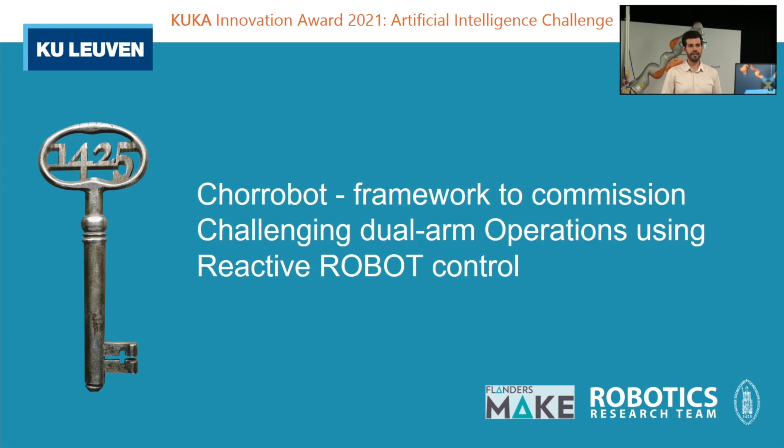Hello everyone, we are very happy to introduce you our team Chorrobot, our concept Chorrobot, which stands for Framework to Commission Challenging Dual Arm Operations Using Reactive Control. We are from the University of Leuven and we are also members from Flanders Make.

Our main motivation is to move from traditional robotics typically deployed in large-size industries, which involve high automation costs associated with programming time, the expertise required for programming, the use of calibrated fixtures, and the fences placed around robots to separate them from humans.

We want to move to more advanced dual-arm applications in manufacturing, where Chorrobot aims at offering intuitive task commissioning of challenging operations that can handle flexible objects, such as inserting O-rings into pistons, as well as the possibility of having two robot arms in the same workspace while handling collision avoidance.

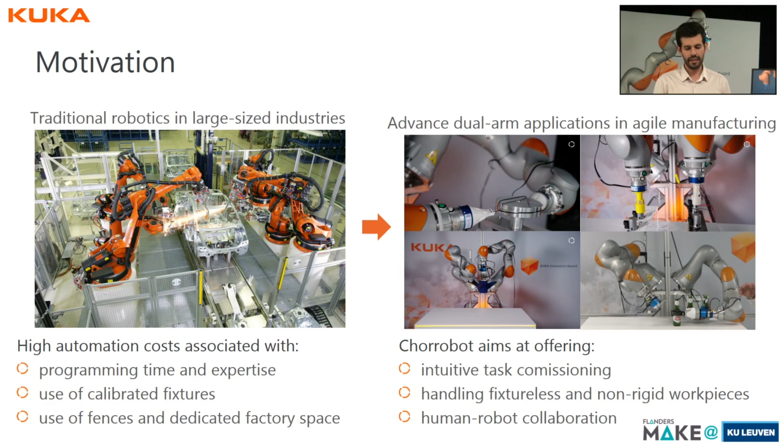We also further exploit the dexterity of Chorrobot, having 14 degrees of freedom to augment the workspace, so we can handle fixtureless and non-rigid workpieces in a human collaborative application.

The main key technologies using artificial intelligence in our concept are the possibility of teaching position, orientation, forces, torques, and coordination between the two arms using our state-of-the-art method: trajectory parameterized probabilistic principal component analysis.

On top of that, we can also enable the specification of other aspects of the task, such as the automatic resolution of constraints, for example collision avoidance.

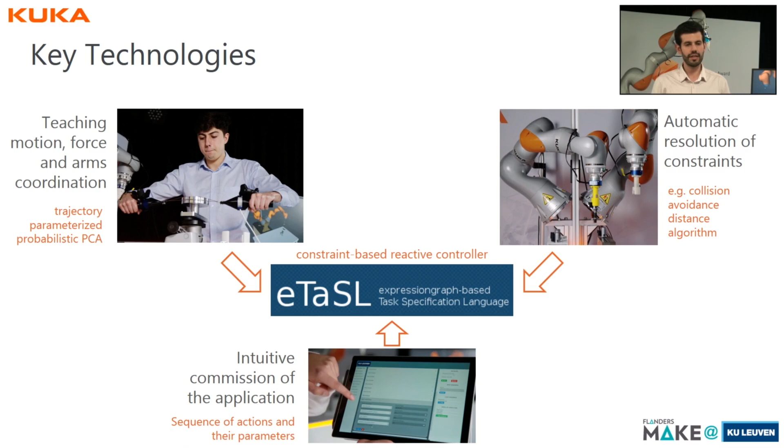All of this can be intuitively commissioned using our graphical user interface, where you can commission the sequence of actions with their parameters, tightly combined with our constraint-based reactive controller, ETASL.

For the level of integration, we place Chorrobot at the very end of the TRL level, so we are already working with workpieces found in factories and in applications that are already very industrially relevant.

Our main customers are robot manufacturers such as KUKA, who want to offer the possibility of completely exploiting their platforms for deploying challenging operations.

Also system integrators such as FRS, which are already deploying challenging operations such as inspection in the Audi factory. Other system integrators we are targeting are already using teaching devices to play, record, and play back motion, for example in free space and simple contact tasks.

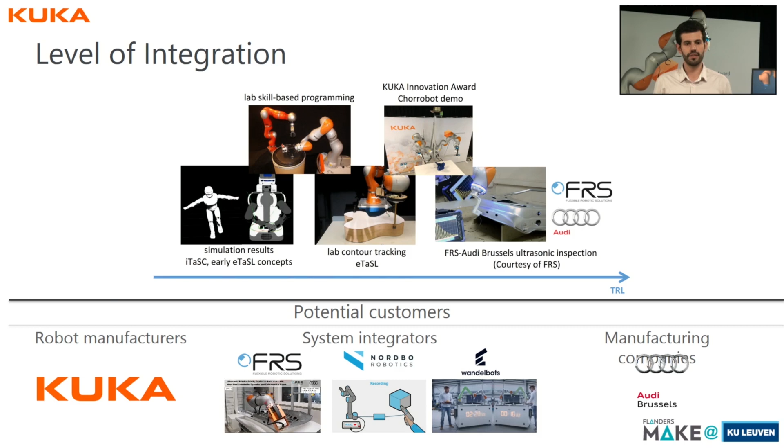Additionally, we want to offer manufacturing companies the possibility to deploy their own applications and further refine them. For the economic impact and competitive advantage, Chorrobot offers higher productivity, increasing economic impact, and lower automation cost, meaning less commissioning time.

For example, for one application, we asked several system integrators, and they told us they would spend around 20 days commissioning one application. We want to offer them the possibility to commission it in 1 to 3 days, depending on the case. Take into account that a robot programmer can cost around 800 euros per day.

We also offer less calibrated fixtures, so the design and development of these fixtures costs between 1,000 and 2,000 euros depending on the application, along with the possibility of having higher flexibility and reliability, meaning fewer stops in the production line.

Chorrobot also offers easier commissioning, enhancing competitive advantage. It will lower the barrier of industrial automation, so there won't be a need for highly skilled robotics experts, offering easier access for developing countries and SMEs. Take into account that the UN is already recommending developing countries to embrace automation.

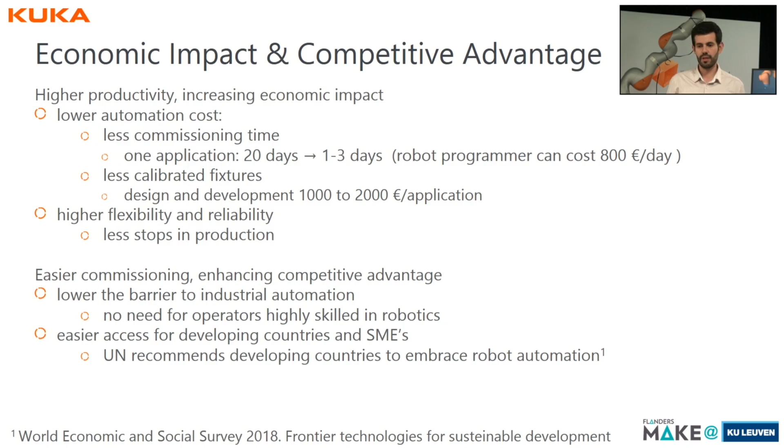Now I want to leave you with the challenging task that we prepared for you.

It is very difficult to program tasks that require two hands using traditional robot paradigms. For this reason, we use artificial intelligence in order to teach Chorrobot how to learn to perform a challenging task through user demonstrations.

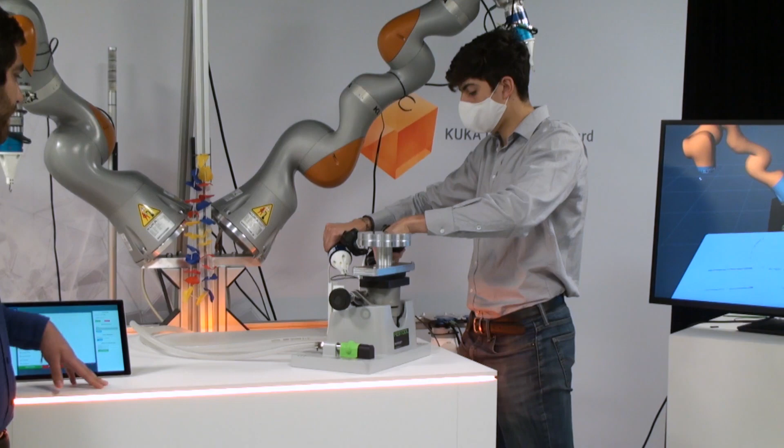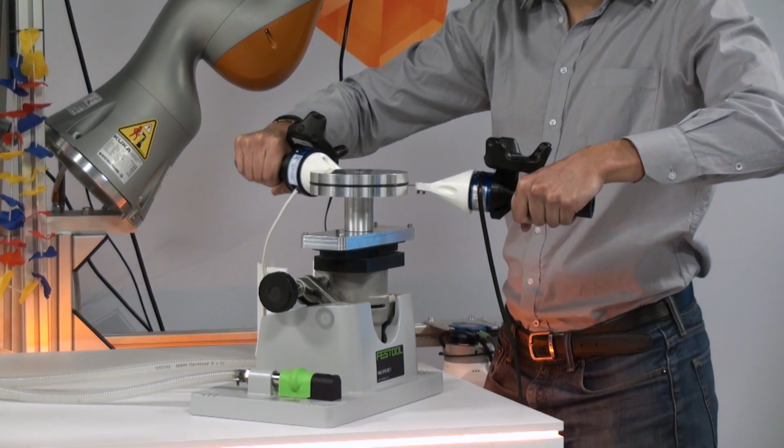In this first application example, you can see how an operator teaches the system how to install a flexible O-ring into a piston. Through the use of our easy-to-use tools, the system not only tracks position and orientation, but also all the interaction forces necessary to successfully execute the task.

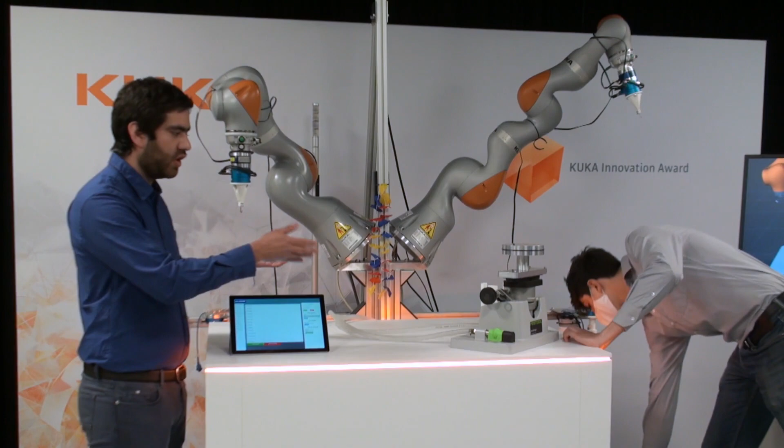After the operator demonstrates not only one but five different positions along the workspace, different demonstrations are made by switching the positions of the piston and also from the picking base.

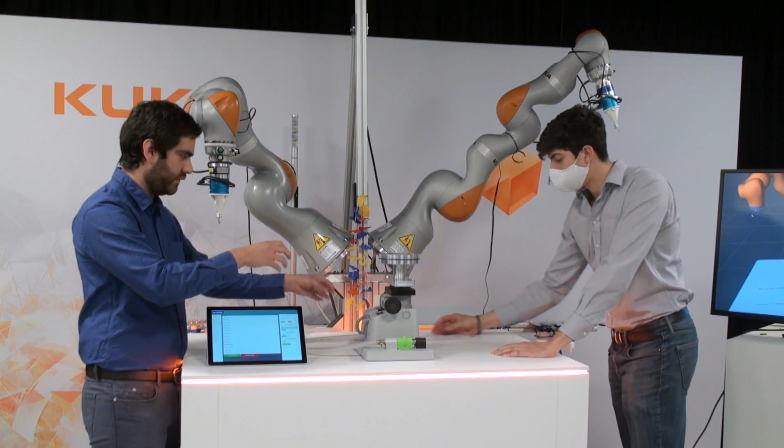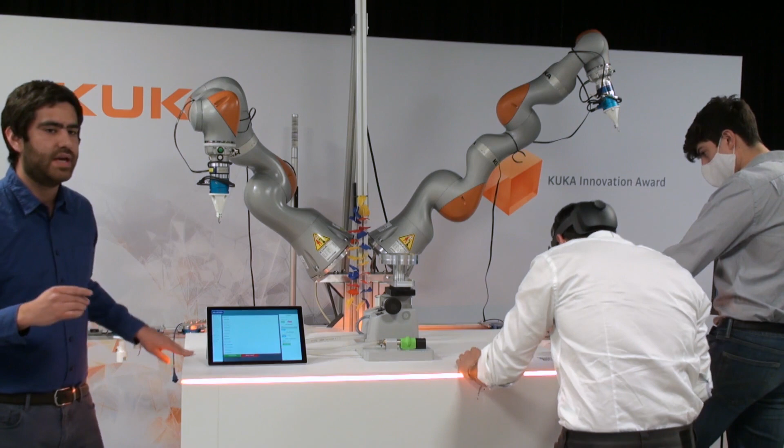Then it is very important to first simulate the task and see that the knowledge was well transferred. For this reason, we use the Microsoft HoloLens 2 to visualize the application in simulation in an augmented reality scenario.

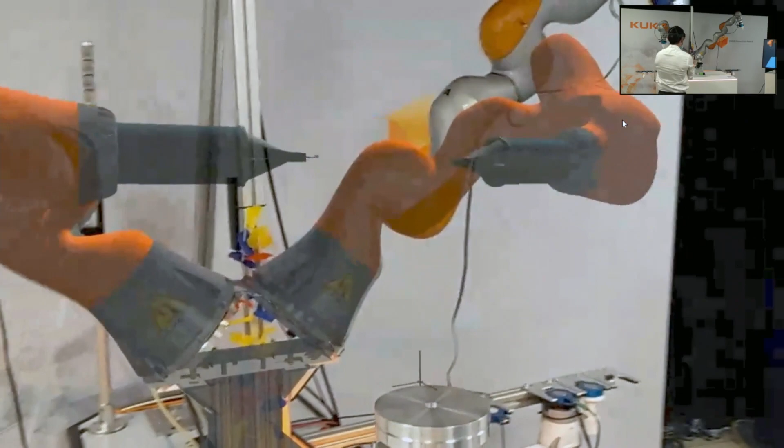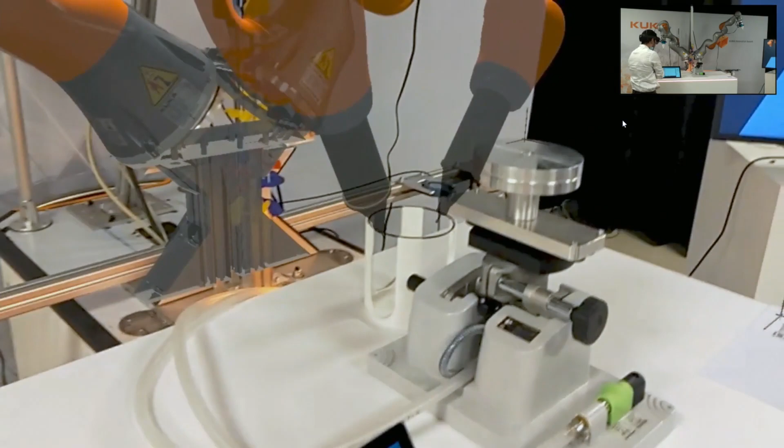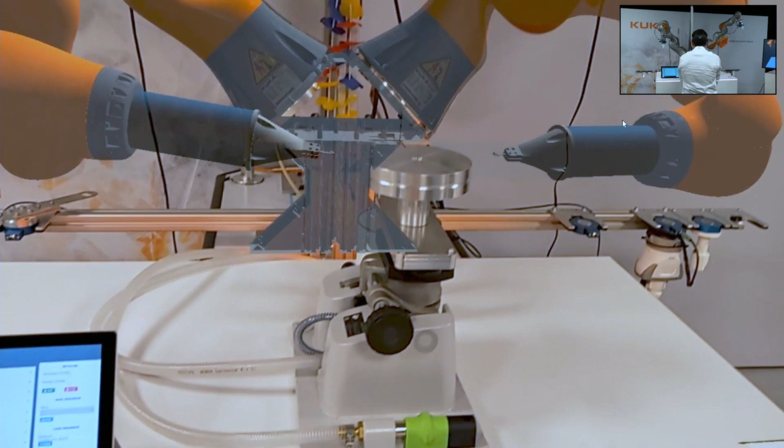This is very useful in order to check, for example, potential collisions with the environment, that the reachability of all the workpieces is fine, and that all the knowledge was well transferred from the operator, who is an expert in inserting the O-ring but not an expert in robotics, to the system.

After we simulate, we can then proceed to execute the task. I will do that using our easy-to-use graphical user interface, which can be run on any mobile device or any device with a browser.

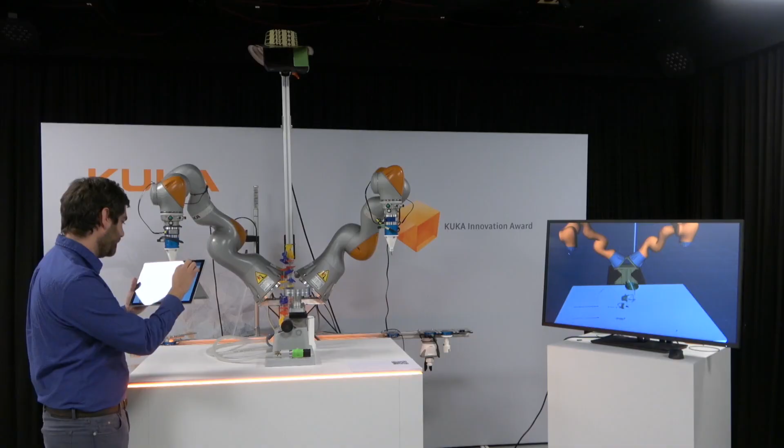So I will initialize the task and then run the sequence.

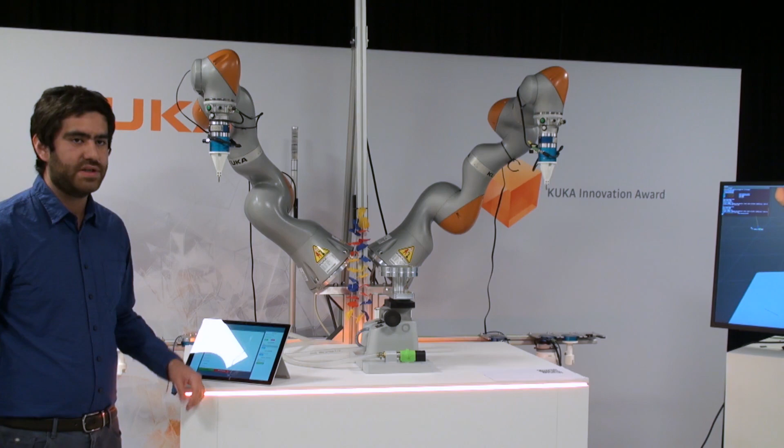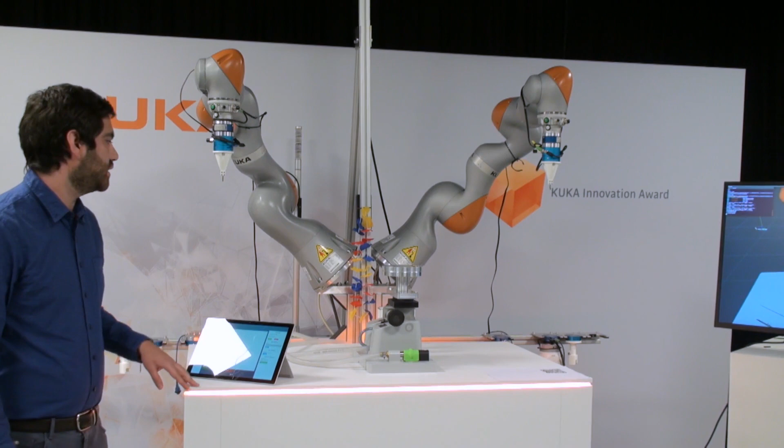So you can see that the first thing Chorrobot does is use our off-the-shelf vision system to detect both objects, the piston and the O-ring base. It's a vision system that is very easy to program and to teach new workpieces. After Chorrobot detects both workpieces, it proceeds to execute the task.

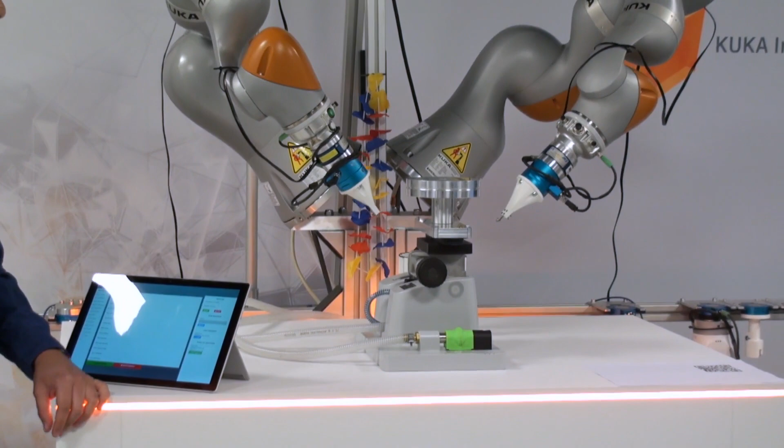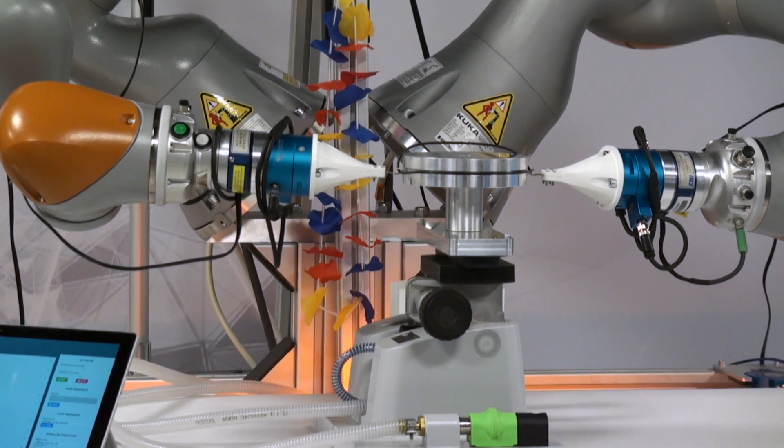This uses the learned model from human demonstrations. Chorrobot first picks up the O-ring, a flexible element, and then proceeds to insert it. Programming this task with traditional robot paradigms would be very challenging because it involves not just point-to-point motions, but all the positions, orientations, and coordination between the hands, which is also learned.

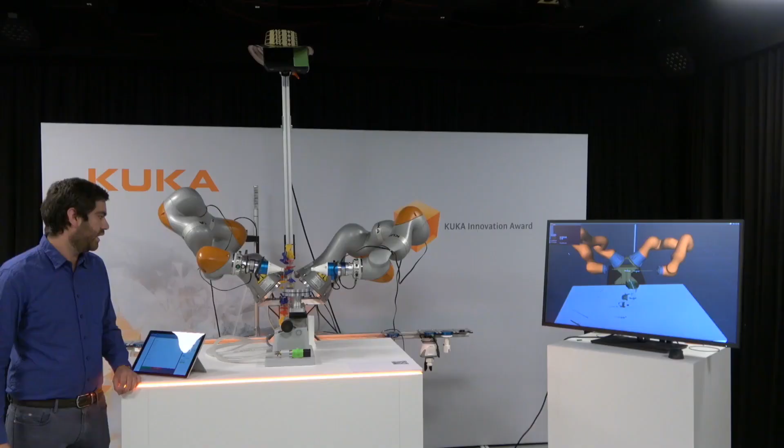You can see that Chorrobot also learns stable contact points, so it knows it should arrive at the piston and then follow the groove to reliably execute and complete the task. Chorrobot also uses the learned forces transferred from the human operator, all the interaction forces, to make this a successful task.

Now we will explain the next task, but first I will command Chorrobot to reconfigure itself with the necessary tools.

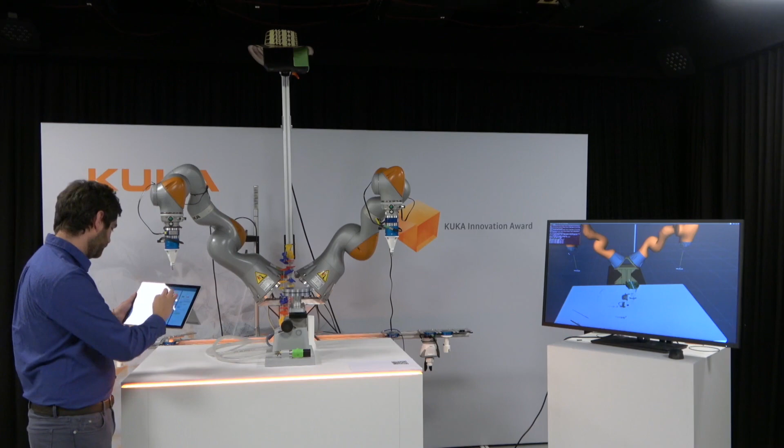Wait, sorry. Yeah. I will initialize then. And I will run the sequence.

Now I'm going to show you the second application, which is to assemble solenoids for an industrial pump. When the application is initialized, the system will detect the location of the workpieces with the Pickit 3D vision camera.

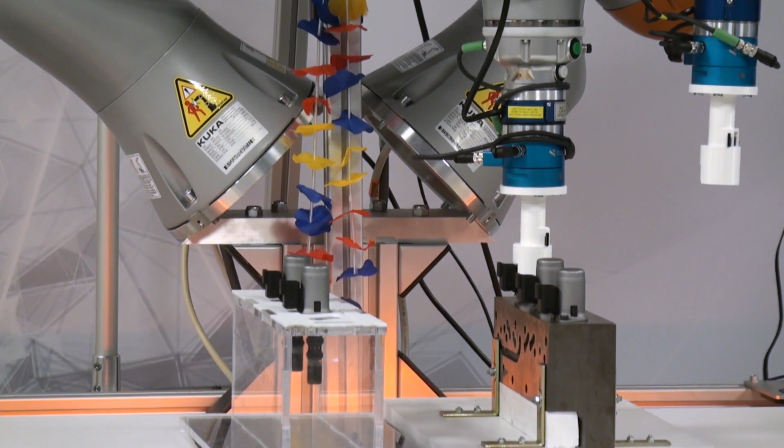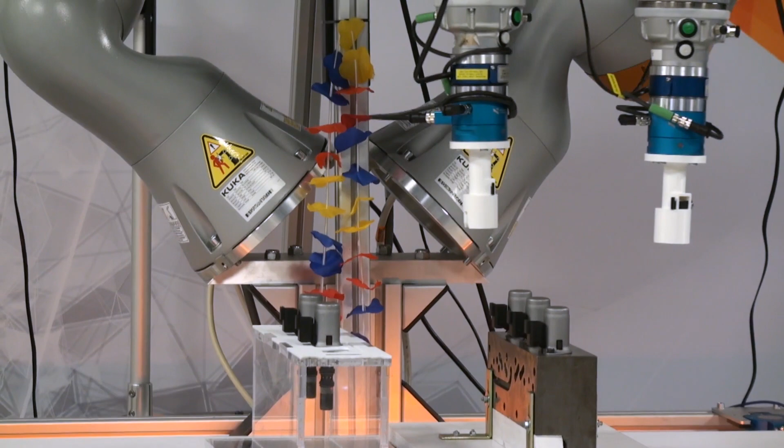This method is applicable regardless of the number of robots. For example, if we need to add an additional robot to increase throughput, this can be done without much programming. This also avoids the need to program high-level coordination, such as task planning, and reduces the overall commissioning cost.

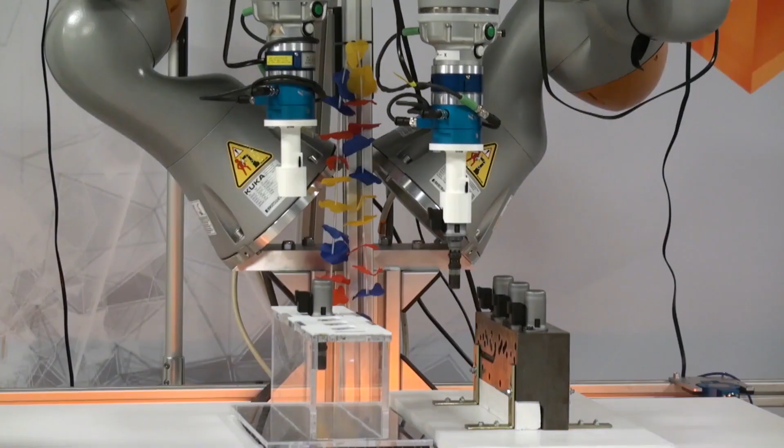The safety aspect of Chorrobot is handled mainly in the Sunrise controller, where programmers can specify limits such as maximum velocities or forces. In addition, our framework allows programmers to further refine safety, for example avoiding collision, but also avoiding collision with the table or restricting the workspace of the robot, which can be easily imposed.

The insertion of the solenoids is performed with force-based insertion skills. This increases robustness because the location of the holes, as you can see, is not so certain, but thanks to the force feedback, we can insert the solenoids quite reliably.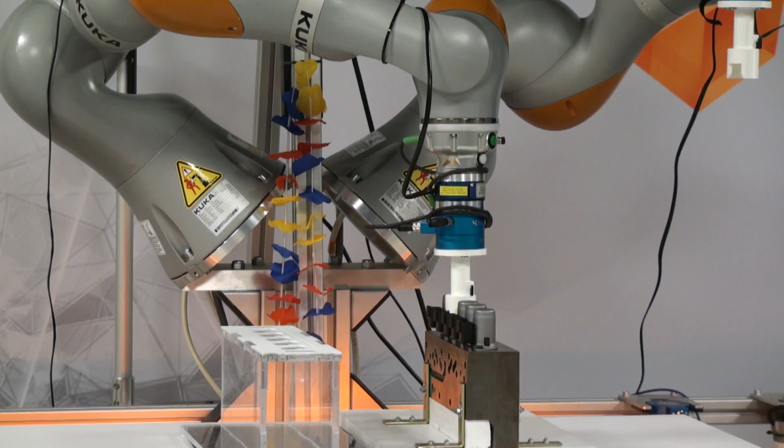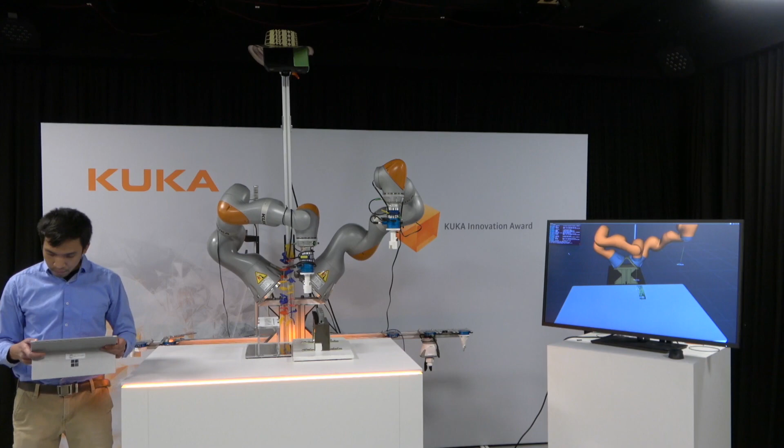After the insertions are finished, the two robots go back to their initial positions. Before we continue with the third task, I'm going to change the tool.

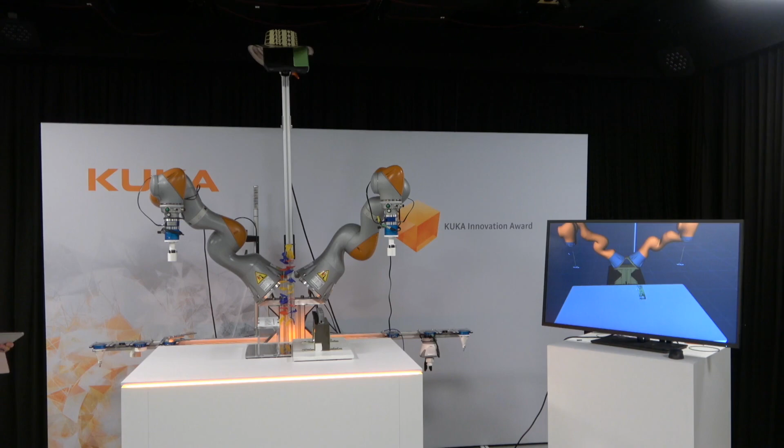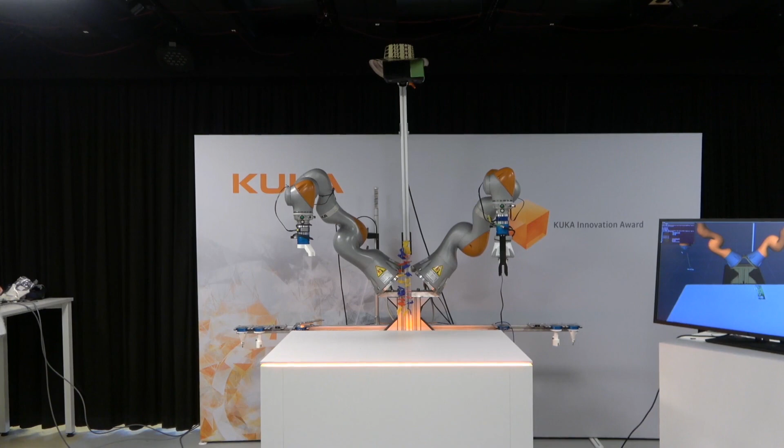Okay, so let me press here. Okay, so our third task

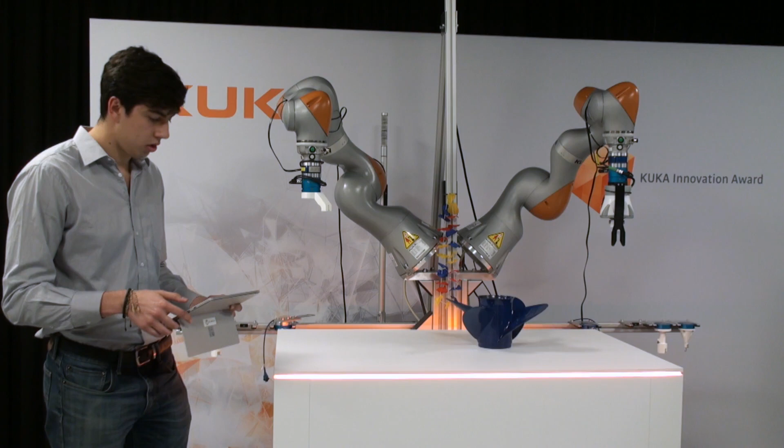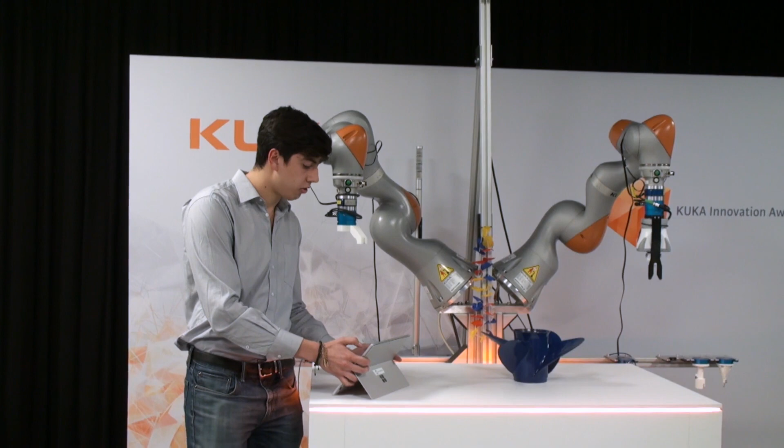Our third task consists of the inspection of an unknown 3D contour from a workpiece.

I will load the sequence again in the graphical user interface so you can see the third application. I will run the robots and move the sequence.

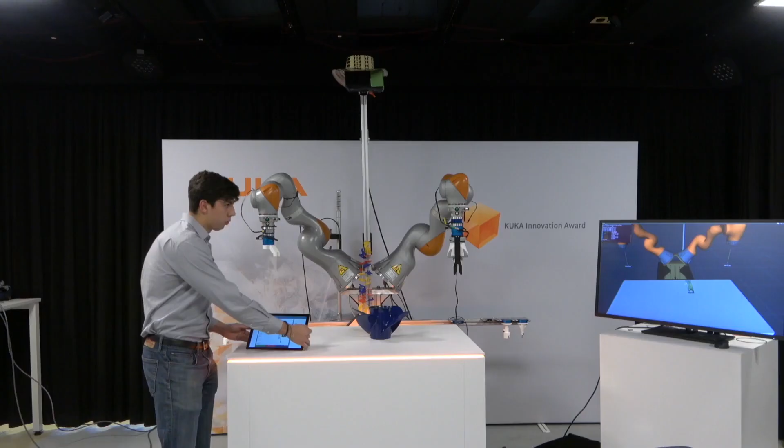This type of task is useful when you want the robot to inspect a layer or the thickness of a painting layer in a workpiece, or check manufacturing tolerances of the workpiece, or even the surface finish of the contour or the flat surface of the workpiece.

So now, as you saw, we again use the 3D vision system to detect where the workpiece is. So again we don't need the fixtures, and the robot will go to that position and grab it.

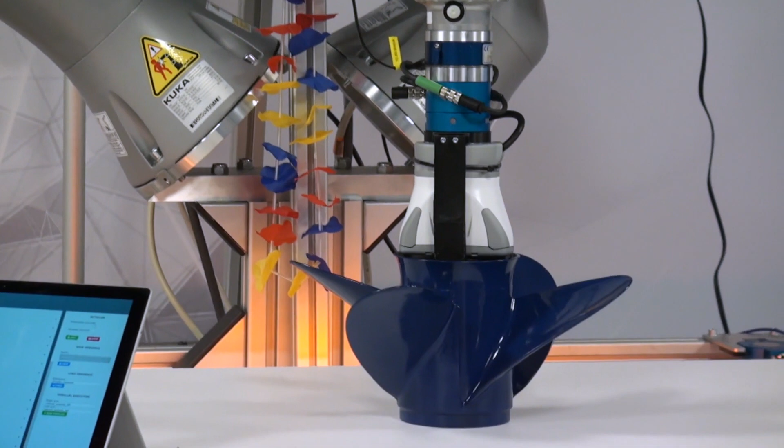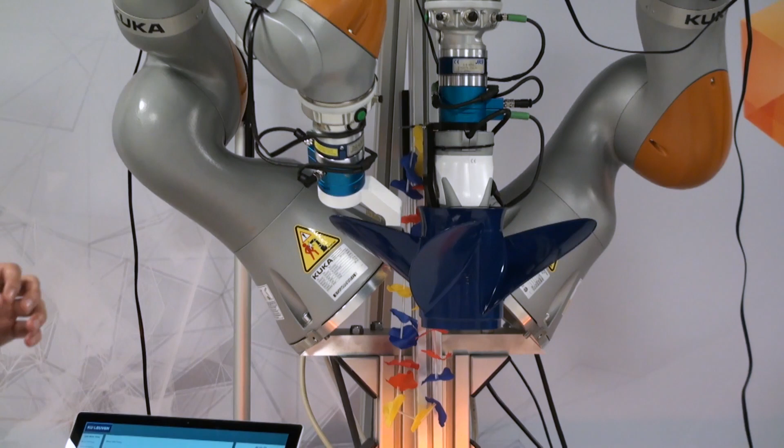Since we don't have previous information of the contour in this application, nor the model of it, the robot will use the contact information between the tool and the workpiece to adapt its orientation along the inspection.

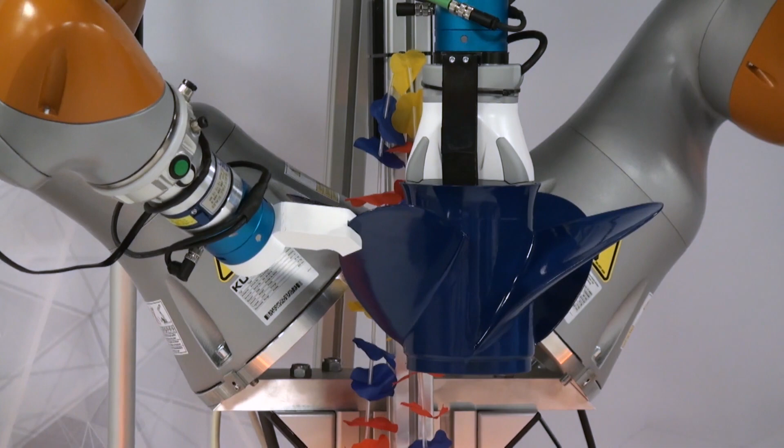Also, as you can see, the left robot will start rotating or moving the workpiece in order to augment the workspace of the right arm, since the 3D shape is complex, so we need to expand the workspace. This is actually running an implementation of the task frame formalism.

The user can specify intuitively in which orientations or directions of the frame he wants to maintain a desired constant linear velocity or angular velocity, while in other directions he wants the robot to keep a certain force.

So now that you already saw 3 applications that show the flexibility of our framework, you may be wondering how an operator can program this type of task from scratch. For that, I want you to take a closer look into our graphical user interface.

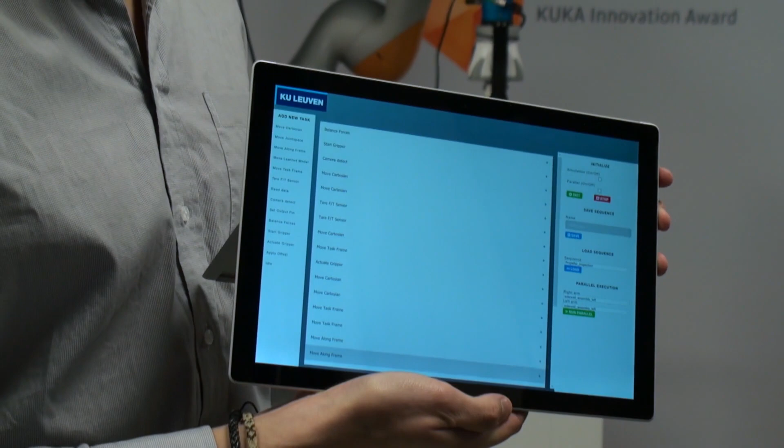Our graphical user interface consists of different applications of different actions that the robot can do, and the user can start composing those actions in order to create the sequence.

We have, for example, normal PTP motions, where the user can specify the parameters, such as the position and orientation he wants a certain frame of the robot to achieve.

We also have more complex blocks. For example, if we add a move learned model, the one you saw in the first application, the user can specify which learned model he wants the robot to execute for each arm.

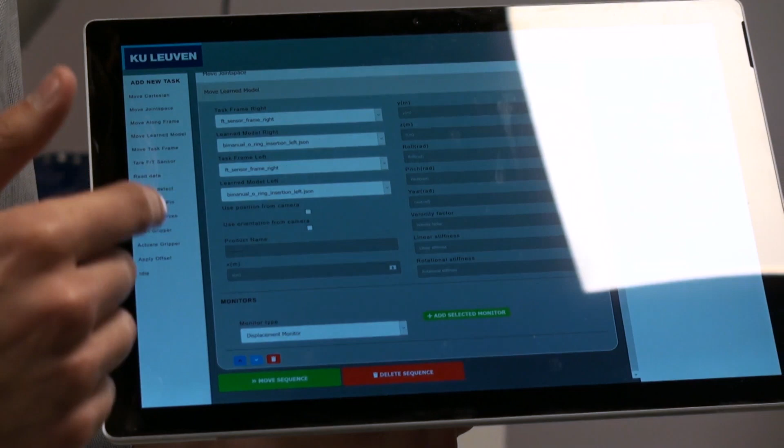He can specify the position and orientation of the part if there is a fixture, but if not, he can tell the system to use the position from the camera, or the orientation from the camera, or both.

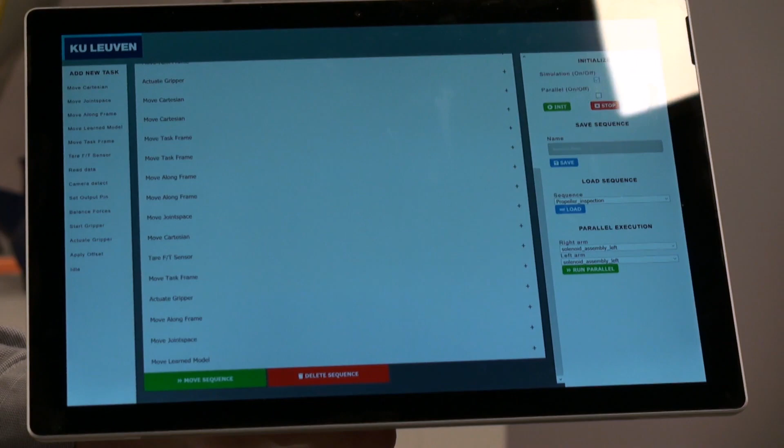In addition, the operator can specify if he wants to run the sequence he's programming in simulation, to check that the robot is going to execute and move as expected. This simulation can be viewed on the monitor or in augmented reality with the HoloLens, as you already saw in the first application.

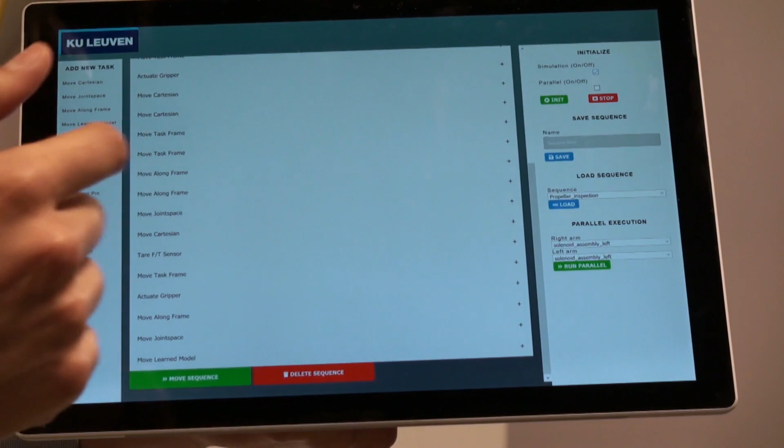Finally, he can initialize again the real robot, and then move the sequence, and that's our graphical user interface.

So now I will give the word again to my colleague for some final words. Thank you.

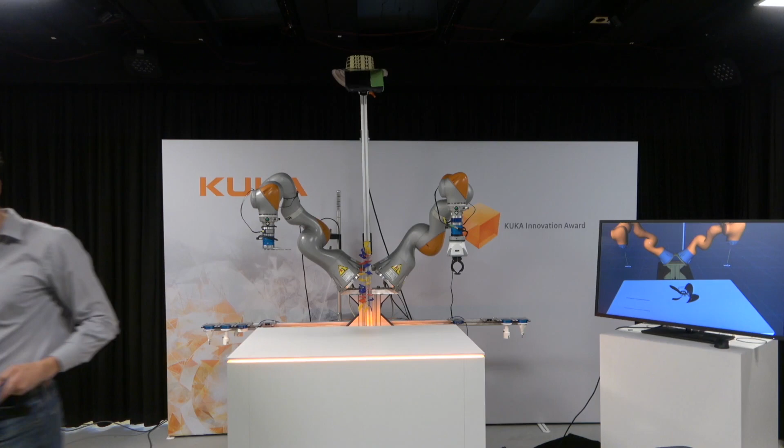As you saw, we were able to successfully deploy 3 challenging operations that are very innovative in the industry and also academically.

We prepared an extra one, an additional one that is out of fun, and that also summarizes all the possibilities that Chorrobot has. For that, I will just start again Chorrobot.

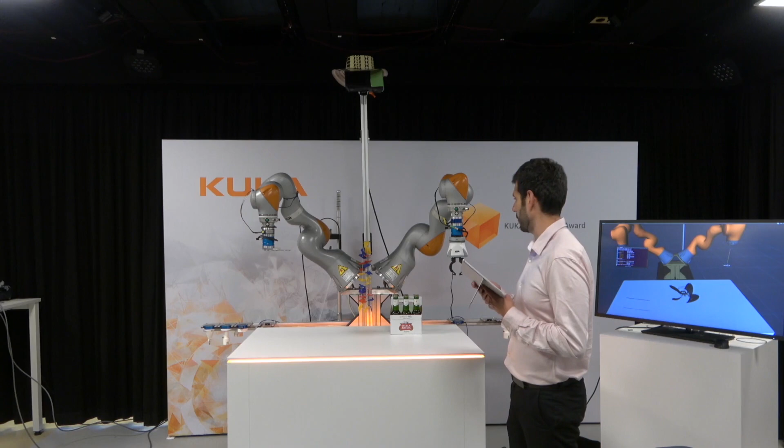So then it's about taking bottles from this crate of 6 beers. It's important to mention that we are leveraging 3D printing, so you can see the tools are designed to get extra reliability in the tasks.

Here we also change the fingers for the gripper, and that enables us to have more reliability when performing the task. Now it goes to grab 1.

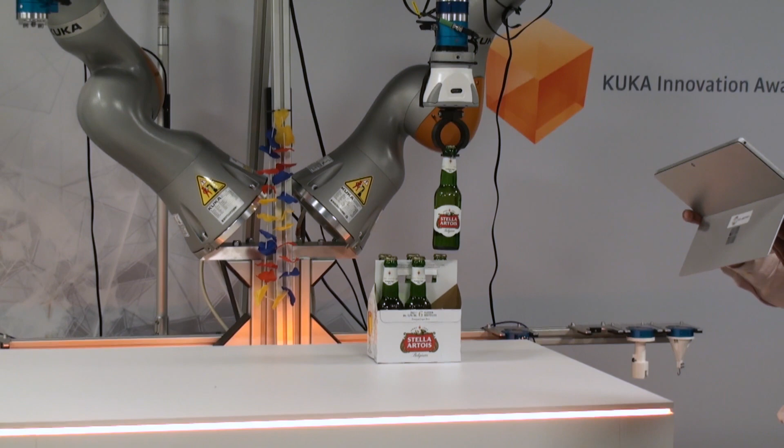Also, you might notice that Chorrobot is mounted on a mobile platform, the Flex Fellow from KUKA. We want to offer factories the possibility to take Chorrobot, install it in different workstations, take little time for commissioning, and deploy Chorrobot in the different workstations.

You could see how Chorrobot is very gentle, putting the Stella on the table, and how it can coordinate the motion of the 2 arms. This part is a motion transferred from human demonstrations.

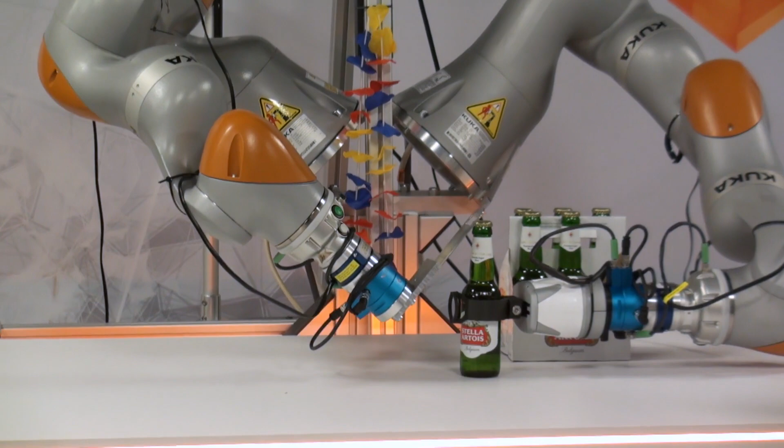The human is teaching how to approach the opener to get into contact with the bottle and successfully open it.

It's important that our system also takes into account velocity constraints, so there are not the high jerks that you exert when you open the bottle, but instead performing it in a safe way.